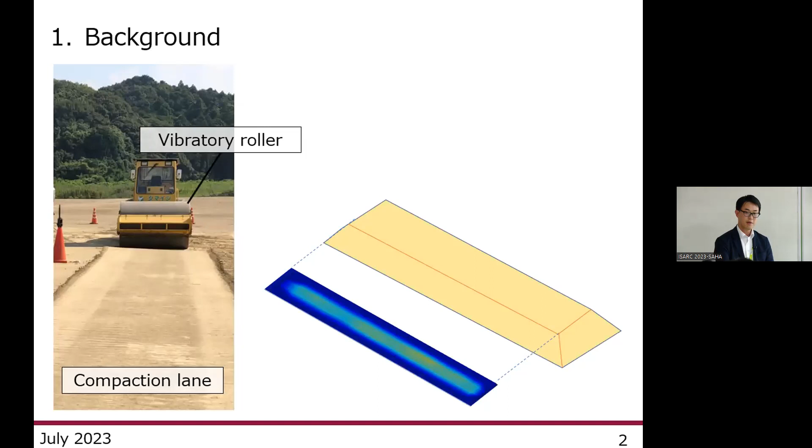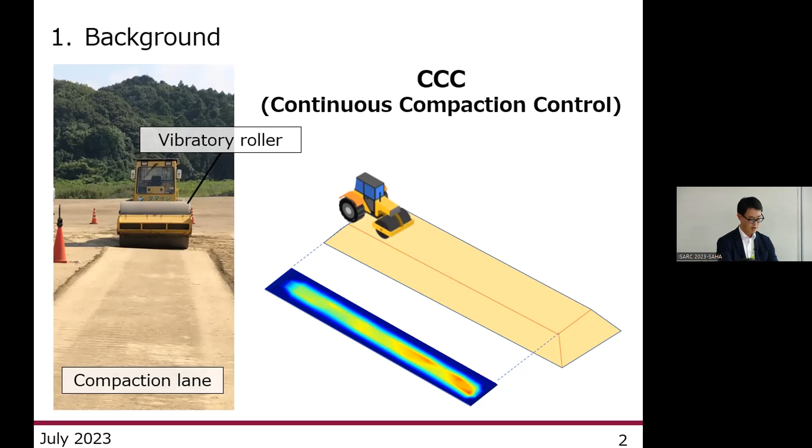So first about our background. During compaction work on construction sites, it is very imperative to verify the compaction degree, of course, and to determine the state of ground stiffness in general. The CCC, continuous compaction control, is one of the most common methods for quality control. And if the roller moves so quickly, it's too dangerous. But in any case, the CCC is one of the quality control methods that uses sensors to detect vibrations in the wheel during compaction.

So the conventional method of CCC is shown on this slide. In the conventional method, accelerometers are mounted directly on the vibrating wheel, like this. And the acceleration response from the response spectrum is measured as rolling pressure progresses. The ground stiffness is determined by disturbance in the spectrum. So using this method, accelerometers are installed directly on vibrating rollers. Therefore, it's possible for accelerometers to pick up huge vibration noise. And also, impact loading may cause sensor failure.

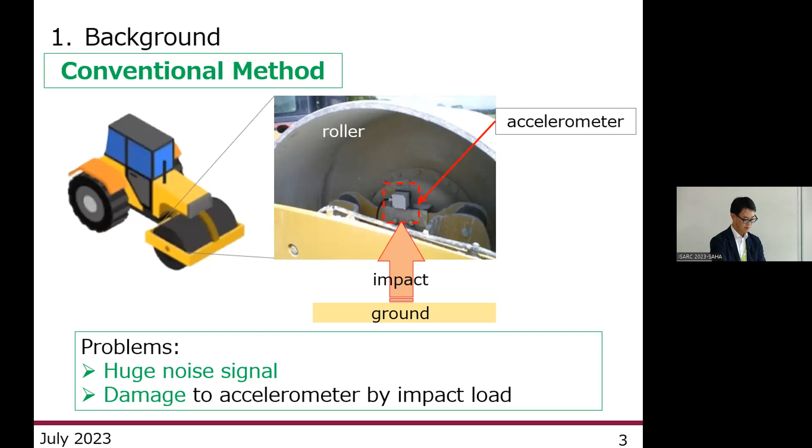So in this study, we proposed the following method. The accelerometers are fixed on the ground surface, and ground stiffness is determined by analyzing the acceleration response spectra obtained from these sensors. So using this method, vibration noise could be reduced, and moreover, it prevents sensor failure caused by impact loading. There's no impact loading like this.

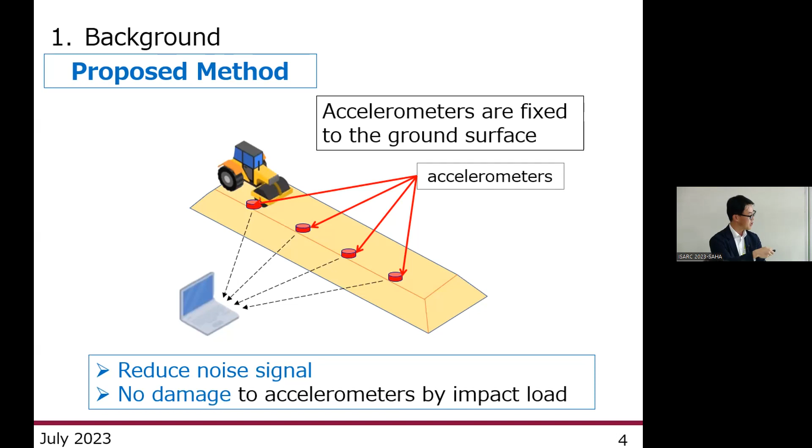There are many indicators of CCC, but in this study, we use the CCV, which means compaction control value. The fast Fourier transform is applied to the vibration acceleration signal to obtain the CCV. And then the fundamental vibration frequency, S0, is determined, this blue bar. And also the acceleration amplitude spectra of integral and half integral multiples of S0 are obtained like these black bars. Based on the spectra, the CCV is obtained using this equation. In this study, the combined amplitudes in the X and Y direction were used. And N is the number of accelerometers in this equation.

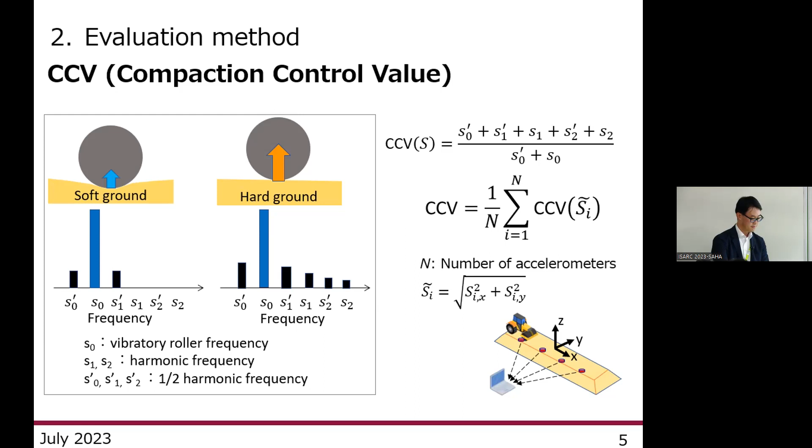So this slide provides an overview of our experiment. An embankment was built on the outdoor field of Kyushu University, and 4 accelerometers were set at the top of the embankment in this red circle to measure the acceleration spectrum during compaction. The soil material used was fine-grained sandy gravel sand, the optimum moisture content is about 10.9%, the average maximum dry density was about 1.96 gram per cubic centimeter, and the natural moisture content during the experiment was about 8.7%.

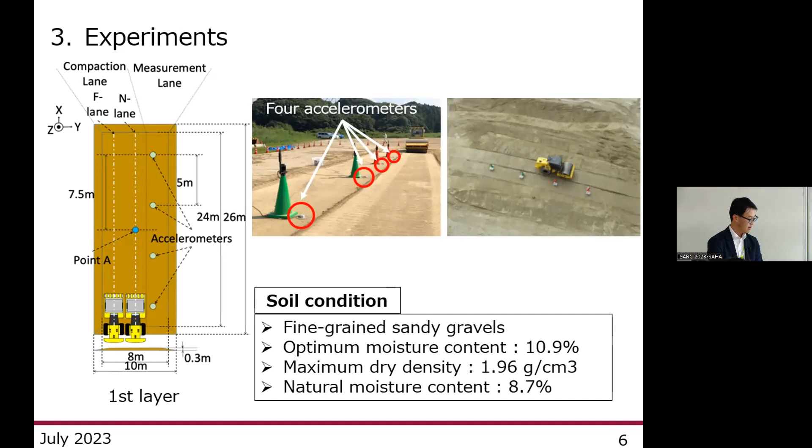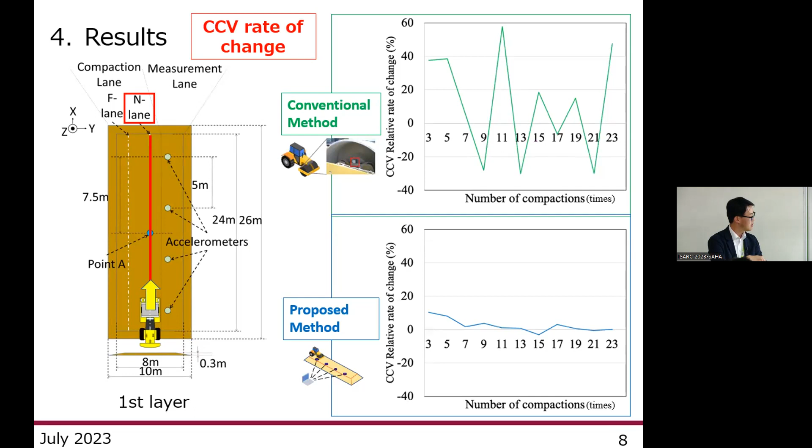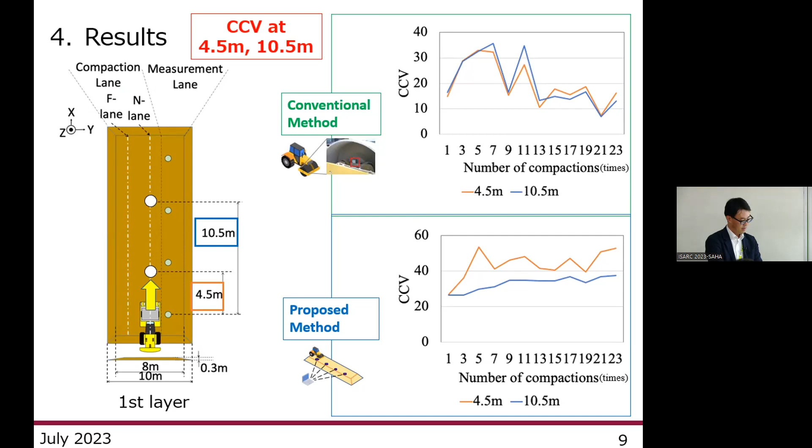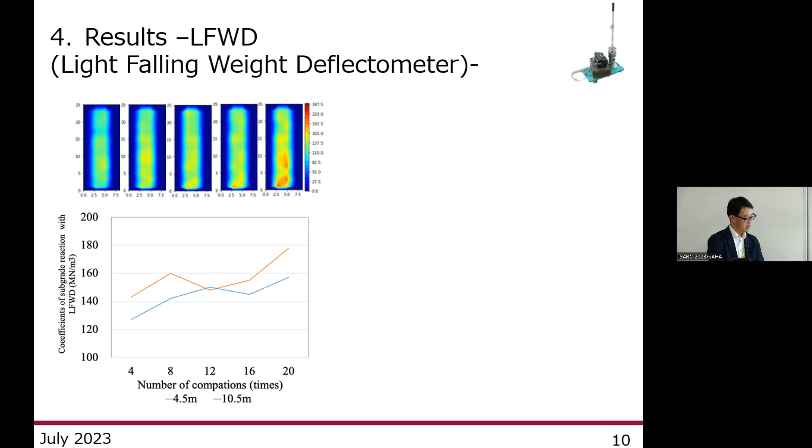So these are the results of the heat maps on the lane. And the coefficients of subgrade reaction obtained from the LFWD at 2 points, 4.5 meter and 10.5 meter, are shown in this graph. In both locations, the coefficients generally increased with increasing number of compactions.

Comparing these results with those shown on the previous slide about the CCV, the CCV by the proposed method is closer to the LFWD behavior. Therefore, it was confirmed that the proposed method's trend was similar to the LFWD, which is a very widely used method to assess the ground stiffness.